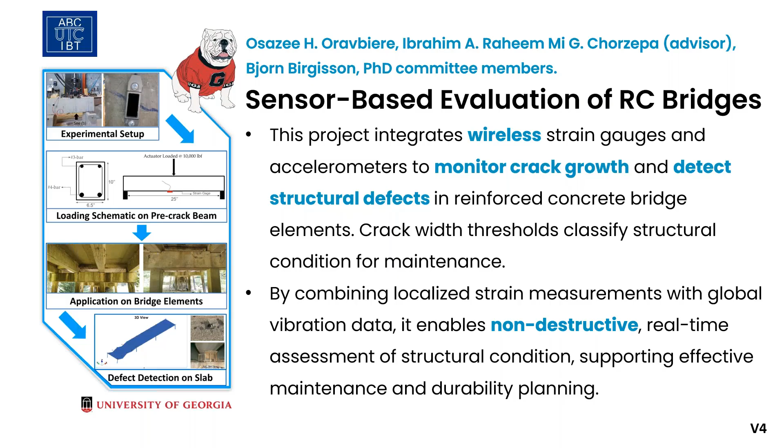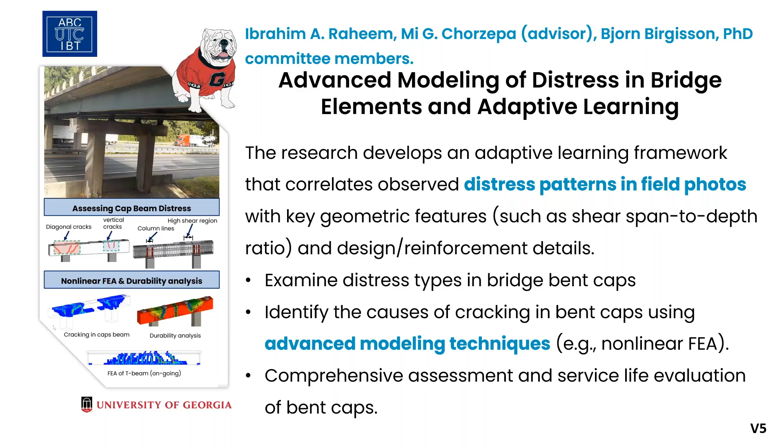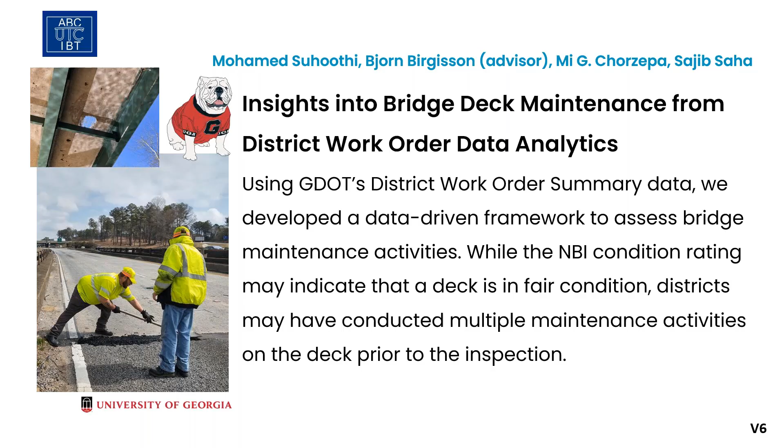Ozzy is working on wireless sensors and bridge monitoring with Georgia DOT. Ibra is doing adaptive learning and cross-referencing distress with advanced nonlinear finite element modeling. Mohammed is working on looking at bridge district data and how it interacts with NBI deck rating.

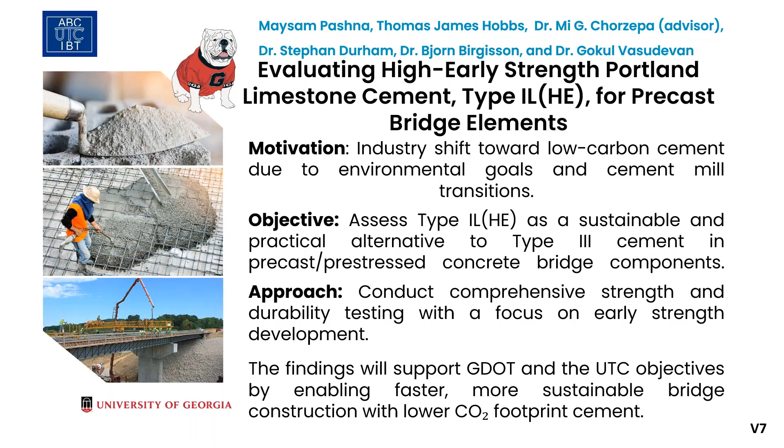Maysam is working on type IL(HE) cement to replace type 3 cement and mixing concrete mixtures at the lab. Jace and Sarah are working on developing in-person, on-demand bridge training modules for off-system bridge owners.

This is an ongoing effort, and we'll be able to deliver the first training module with a district shortly. Sachin, another PhD student, is working on delivering and enhancing bridge education for knowledge transfer.

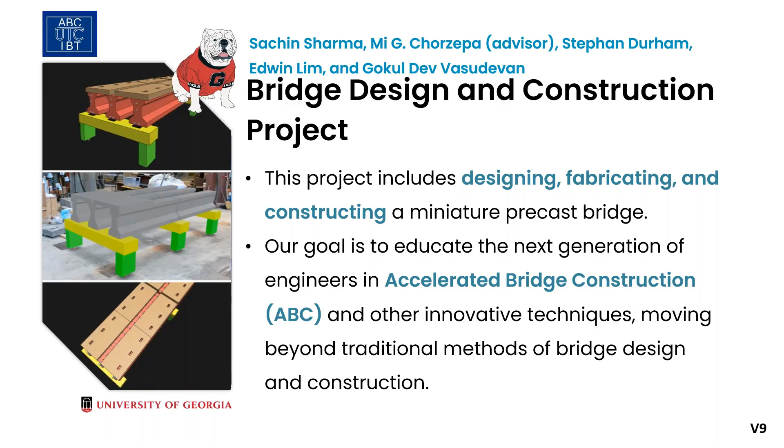This project is funded by the PCI Foundation, Georgia Carolinas PCI, in conjunction with resources provided through FIU. We are teaching our students by delivering hands-on experience in fabricating precast bridge elements.

Another element of knowledge transfer at UGA that we're working on as part of the UTC member partner is that we have just launched an online Master's in Civil Engineering, and we are requiring a bridge engineering studio as part of this class. We collaborate with Georgia DOT, Don Digman, and Ravendra with maintenance and more.

We also collaborate with design companies such as MBI and Gresham Smith, and hope to collaborate more, showing the fabrication process with standard concrete products, highlighting construction with CW Matthews, and finally teaching the concept of accelerated bridge construction with FIU, FHWA, and State DOT resources.

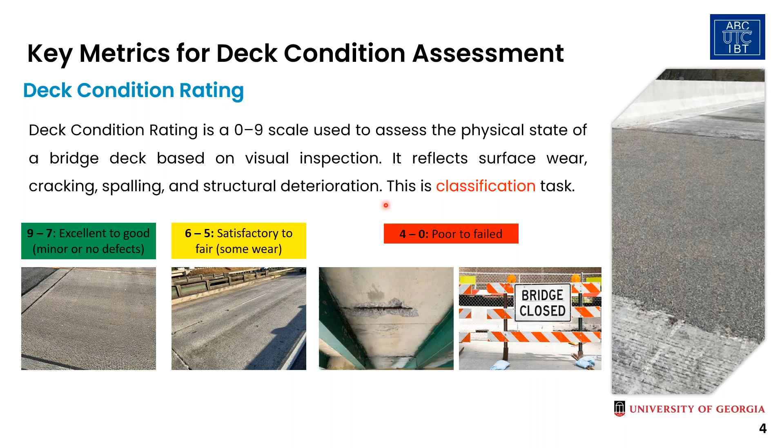In terms of developing a deep learning model, the deck condition rating is a classification task, mainly because we're choosing from a fixed range of labels, from 0 to 9. These are fixed labels, not a continuous number to predict.

The other metric, the deck health index, is a continuous value we're trying to predict, ranging from 0 to 100. The deck health index is a composite score that quantifies the overall condition of the bridge deck by considering the extent and severity of defects across the deck area.

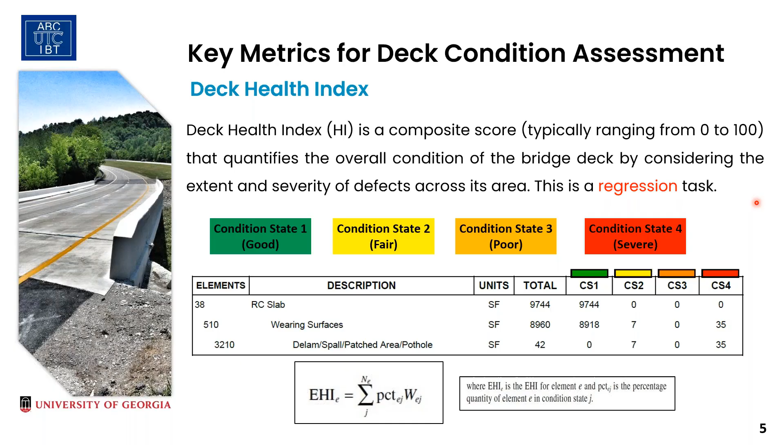This makes it a regression task for the models we're going to develop. Briefly, I'm going to go over some of the prediction models out there. As we know, there are many prediction models, but my major focus for this presentation is on the models present in the FHWA InfoBridge platform, which contains three major predictive models for bridge components.

And what I mean by components are the deck, the superstructure, and the substructure. The first of these models is the base model, which is a statistical deterministic model, while the second model was a survival model, and then finally they have the machine learning model.

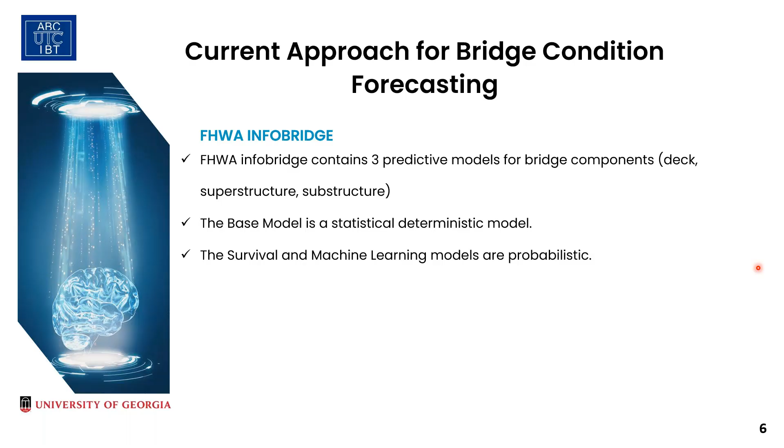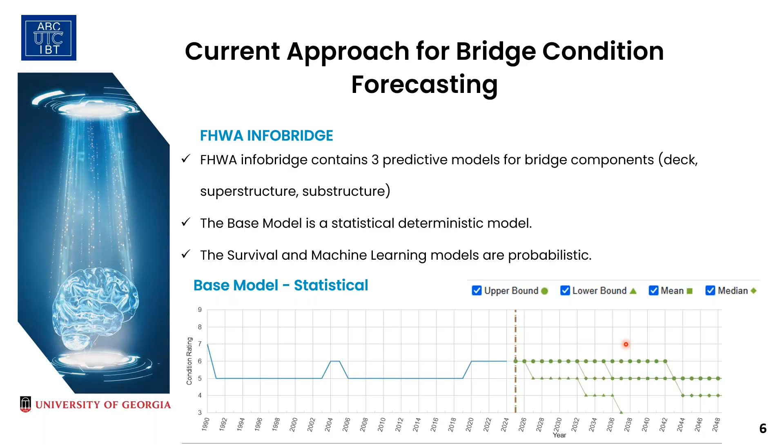Now, going over the first model, which is the base model. The base model generally uses the historical time and condition data for similar bridges to predict future conditions. It looks at bridges with similar features and learns how their conditions have changed over time. From this plot, you can see the blue line shows the actual past condition rating for this selected bridge, and these green dots right in front of it are the model's predictions based on how similar bridges have deteriorated in the past.

The second model present in the FHWA InfoBridge platform is the survival model. It works by using a combination of survival analysis and Markov chains, calculating the transition probability of changing from one condition state to another over time.

But for the two models I've gone over so far, one major limitation with both of them is they majorly focus their prediction based on the past condition state and ignore factors that can influence the change of bridge condition over time, such as traffic, the bridge age, the bridge material, and the likes. But one FHWA model that actually incorporates all of this is the machine learning model, where they made use of the convolutional neural network, the CNN. In this case, the CNN learns the patterns from the bridge features to predict how bridges deteriorate over time.

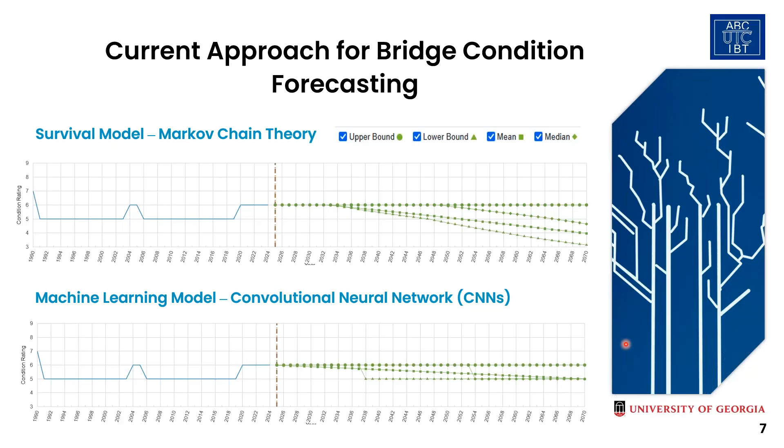At the University of Georgia, one thing we developed is a model that also considers all the features just like the FHWA CNN model. But one thing we added to it was to have a model that captures temporal progression and also has an improved accuracy.

So we developed the recurrent neural network model, in this case, the LSTM, that is the long short-term memory model, and the gated recurrent unit model, which were both designed to process the input data year by year.

And what I mean by this is, let's say we have nine years of bridge data. The model is going to learn how the bridge condition has evolved from the first year down to the ninth year, and then it's going to use the learned sequence to make predictions of what is going to happen next. So RNN, in summary, generally learns when and why deterioration happens and not just make predictions of what's going to happen next.

In the development of prediction models, there are several steps involved. The first step is to retrieve the necessary database we need to build the model. So we collected nine years of the National Bridge Inventory data and bridge element data, and this database generally contains the relevant geometric and operational features needed to process the development of the model.

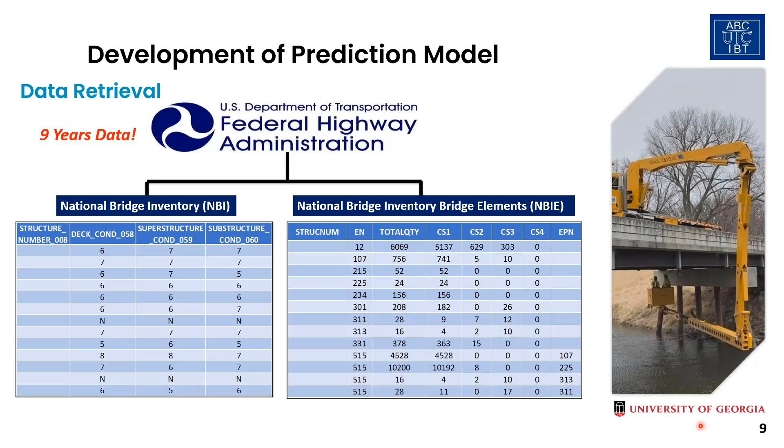And in training our models, we wanted to build a robust model that's going to generalize well. So we needed to select two states with contrasting bridge deck data. We carried out a nationwide deck assessment using the 2024 National Bridge Inventory database to determine the states with the highest percentage of decks in good and poor condition.

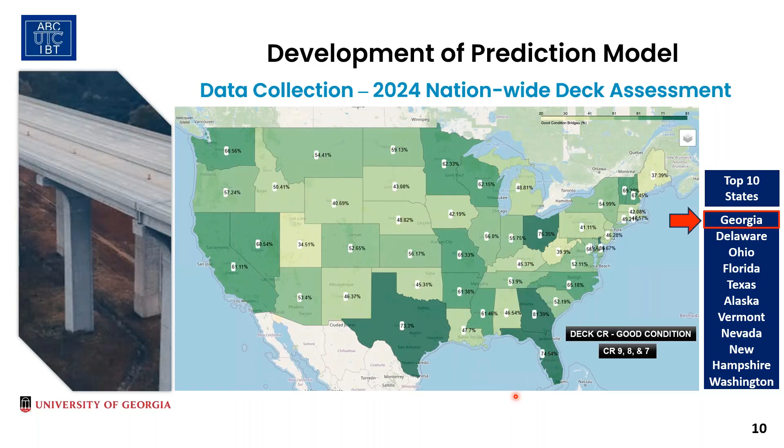So first we looked at the percentage of decks in good condition, and you can see from these figures, the states with the darker shades of green, just like Texas, Florida, Georgia, indicate the states that have a high percentage of decks in good condition. So from this, we were able to select Georgia as it ranked number one in the country.

And then on the other side of this, we looked at the percentage of decks in poor condition nationwide, and we narrowed this down to Iowa and Maine as the top two states with a high percentage of decks in poor condition. But we decided to go with Iowa as they have more bridges than Maine. In Iowa, they have more than 20,000 bridges, and in Maine, they have less than 3,000 bridges.

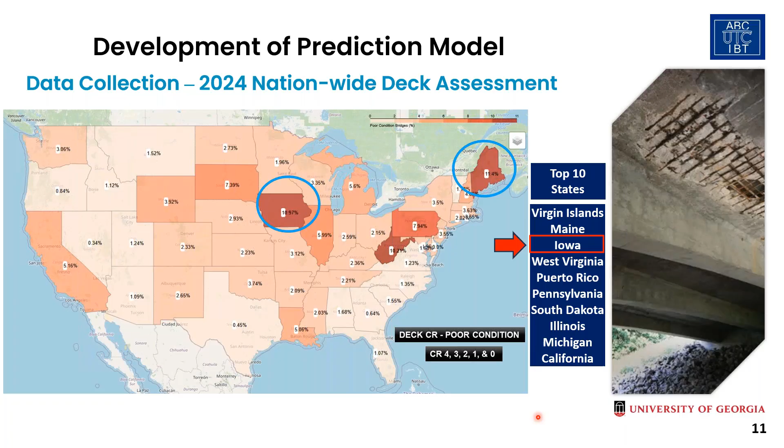One thing about training a deep learning model is the more data points you have present, the better it is for the model to learn. And since the assessment we carried out so far was done using just one year of data, the 2024 NBI data, we decided to look at the trend for the selected states. In this case, we selected Georgia for the states with a high percentage of decks in good condition, and Iowa for the other side of it.

One thing we did was look at the deck condition rating for the last 5 years to better understand the trend in each of the states. We noticed that in Georgia there's an upward trend in the percentage of decks in good condition, while in Iowa the reverse is the case.

Having this kind of contrast is very good for training our prediction model, because it's going to be very robust. But for the rest of this presentation, my major focus is going to be on a model we trained using the Georgia database. So for the Georgia data, we were able to select a set of features used to train the model in predicting each of the metrics we wanted to predict.

We came about these features from several iterations, relating with several literatures, and also from the conversations we had with some DOT personnel. But one thing to mention is for other states that plan on implementing this approach, the set of features selected for each state might differ.

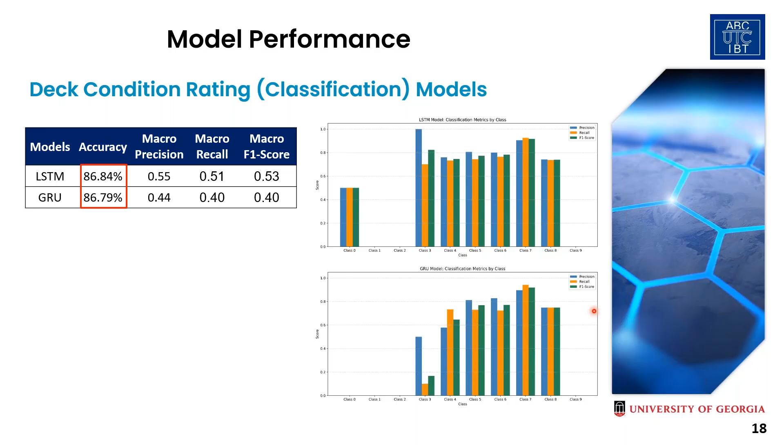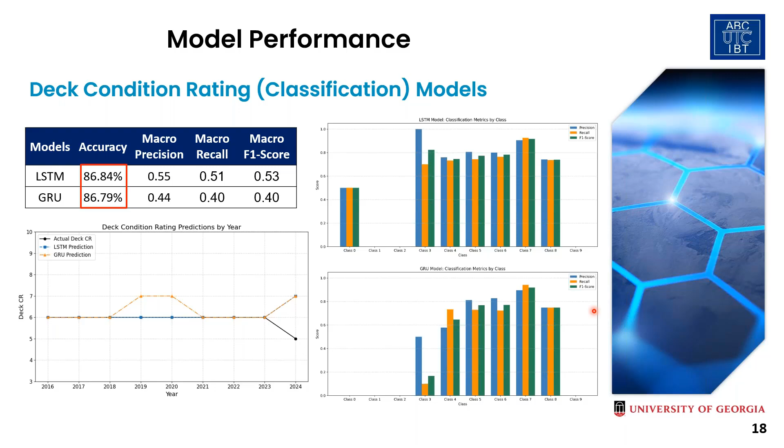Now, to evaluate the long-term use of the trained model, we selected the best performing classification model to make future bridge deck condition rating predictions from 2025 to 2032, using the model's learning from historical data from the state inventory. We can see that the model predicts a minor deterioration in 2025 and then reverts to the longer term stable trend it has observed in the state inventory.

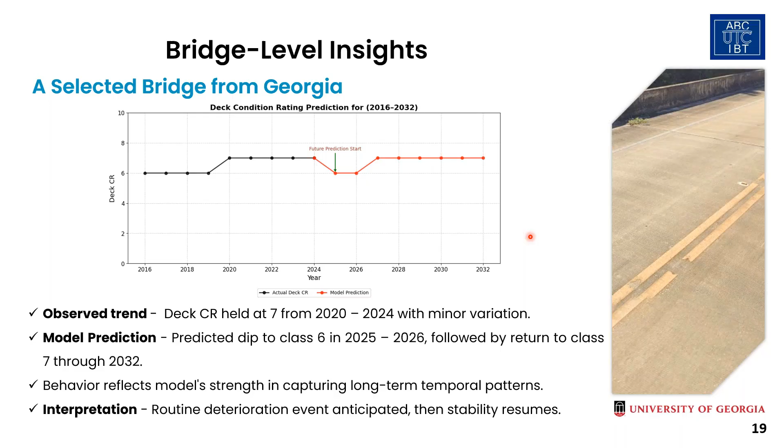But since Georgia bridges exhibit mainly an improving deck condition trend, evaluating the RNN model's ability to actually predict progressive deterioration could not be adequately tested using Georgia data alone. So to fairly evaluate the model's ability to predict declining condition scenarios, we considered the data from the Iowa database we collected earlier.

Using the same architecture but a different set of features, we trained the model on Iowa data, and selected a bridge in Iowa to make future predictions. From this plot, we can see that after a long stable period in condition 8, the actual rating drops to condition state 7 in 2024.

And then the model picks up on this change, predicts a slight recovery, and then a gradual decline into 2032 to condition state 6. This behavior reflects the Iowa training dataset, which contains a lot of bridges in fair condition.

Using another state's data to test how the model performs shows the importance of training the model for specific state regions, as it captures the localized degradation behavior in each of these regions.

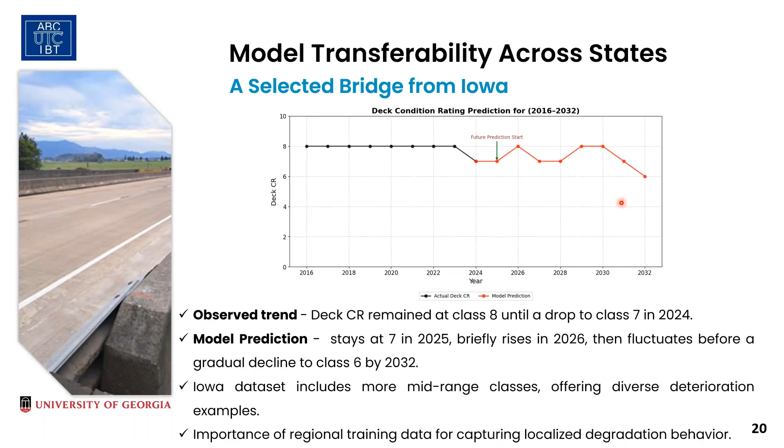In terms of other applications of this model, we extended it to predicting the overall bridge health index, which combines the deck, superstructure, and substructure condition ratings using weighted coefficients.

For this selected bridge, we can see that both models actually track the actual bridge health index value closely. This demonstrates the model's flexibility to predict composite indices like the bridge health index, not just individual bridge components.

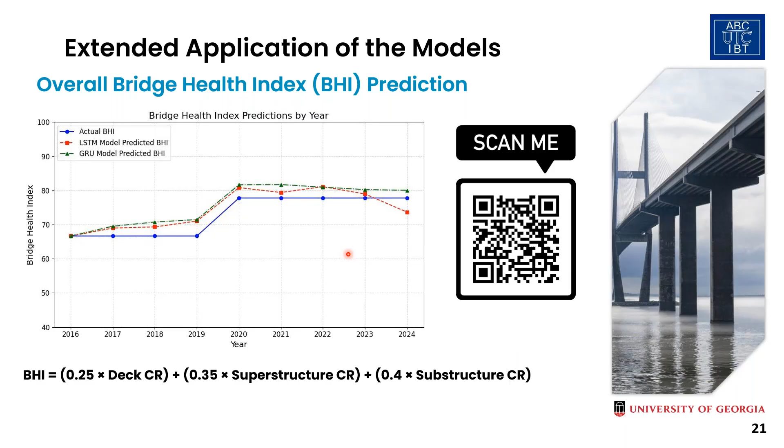You can scan this QR code to get more information about this approach, because we recently published a paper that details a lot of the process in developing a model to make an overall bridge health index prediction.

In terms of network performance, the 3D plot shown here shows the model's ability to handle multi-bridge forecasting effectively. This allows DOT to assess the condition of an entire bridge inventory simultaneously.

It also provides a clear view of the future trend of the bridges in an inventory, thereby aiding bridge owners in understanding the long-term health of bridge assets.

From a planning and budget allocation point of view, the ability to predict the future condition trend at both the bridge and network level helps in making data-driven maintenance decisions, resource allocation, and long-term capital investment strategies.

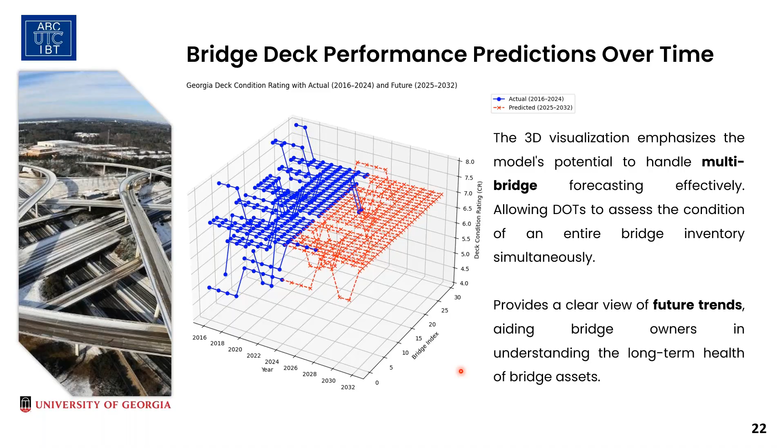So in summary, one thing I want to emphasize is that we have developed two prediction models, one with a dense layer and one with a time-distributed layer, and both are capable of making bridge condition predictions.

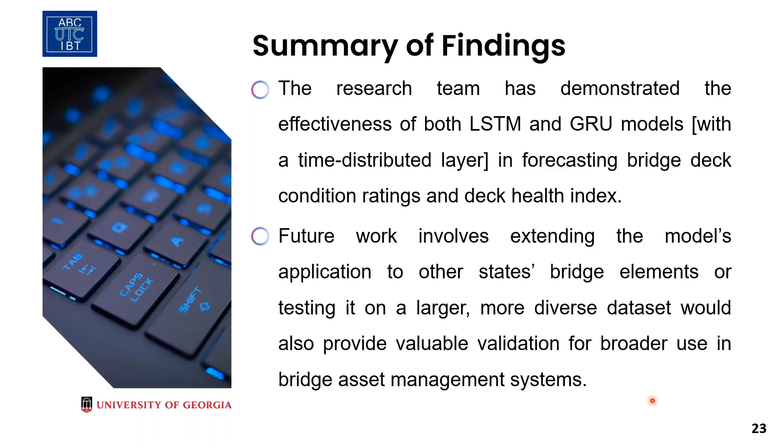In this UTC project, I specifically worked on the scenario-based decision support part to develop a next generation asset management system. As already explained, in addition to the temporal prediction of structural condition rating, we utilized a graph-based modeling approach for spatial network integrity assessment.

As you know, the highway system is inherently structured as planar networks. They can naturally be adapted to primal graphs. In doing so, we first acquired a statewide roadway network dataset for Georgia in a geospatial format from the Georgia DOT website.

As you can see in the figure at left, the Georgia network consists of 205,292 roadway sections. To obtain the spatial distribution of bridges in Georgia, a bridge geodatabase was also collected from the Federal Highway Administration website.

Deck condition rating of those bridges, obtained from the National Bridge Inventory database, typically ranges from 0 to 9. But for Georgia, the rating is highly concentrated between 5 to 8, as you can see from the figure at right.

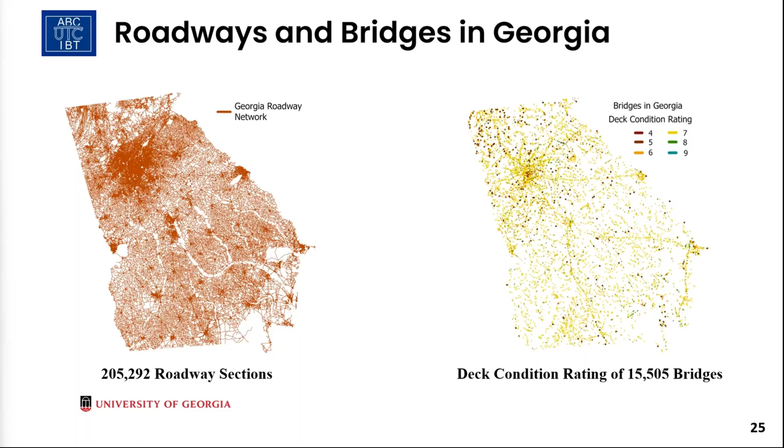Now, to generate a graph network for the highway bridge system within Georgia's National Highway Freight Network, first, GIS shapefiles of the freight network were collected from the Federal Highway Administration portal, as you can see from the figure at left.

Georgia's National Highway Freight Network spans 1,753 miles and is comprised of the most critical highway segments connecting major cities such as Atlanta, Savannah, Augusta, Macon, and Columbus.

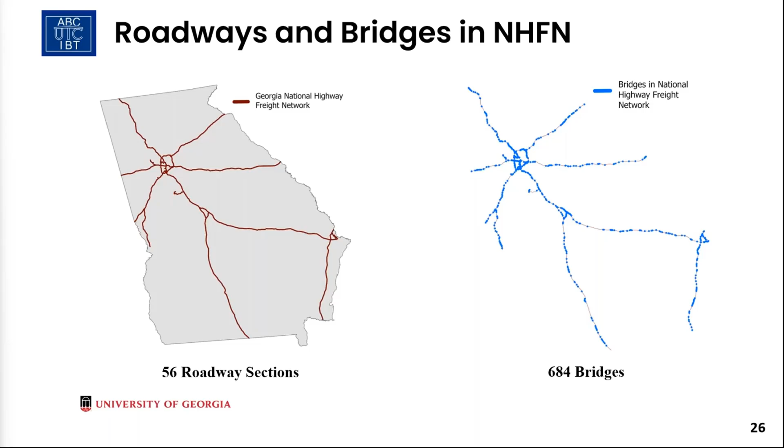And in the figure at right, you can see out of a total 15,505 bridges in Georgia, only 684 bridges are identified passing through this National Highway Freight Network.

Now, once we obtain the shapefile of the National Highway Freight Network, a Python library, NetworkX, is used to convert it into a network graph, as you can see in the figure at left.

This figure illustrates the structure of the network by displaying the distribution of node degrees. Here, the node means the intersection in the highway network, and the node's degree means the number of edges or pavement sections connected to it, or connected to the intersection.

The blue, green, orange, and red colored nodes here represent nodes with degrees of 1, 2, 3, and 4 respectively.

The figure at the right shows the number of nodes in the network for each specific degree.

Bridges within this highway freight network are integrated with the graph network of highways based on their geospatial coordinates. It is assumed in this analysis that bridges are the only component that can fail, which leads to the removal of an edge from the graph due to bridge closures.

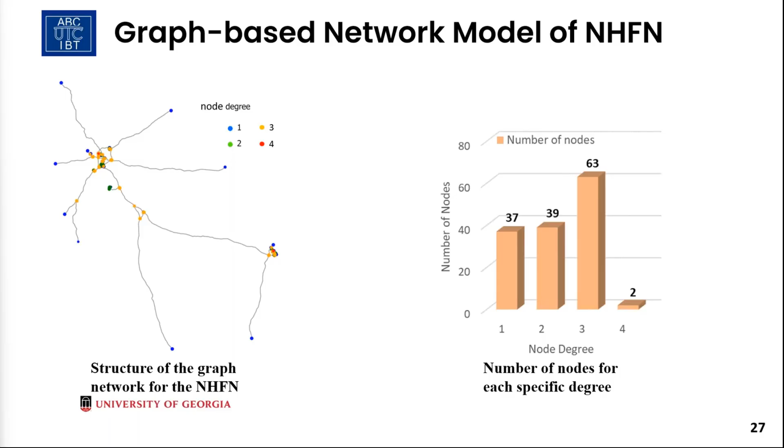Here we can see various metrics which have been introduced in the past to assess the topological integrity and robustness of roadway networks. Some of them are listed here, such as global efficiency, average distance, percolation limit, average node connectivity, maximum betweenness centrality, and network robustness index.

Out of all these measures, we have seen that node connectivity, betweenness centrality, and robustness index are the most popular metrics. For example, the robustness index metric is characterized based on the average size of the giant connected component of a network after removing each node one by one.

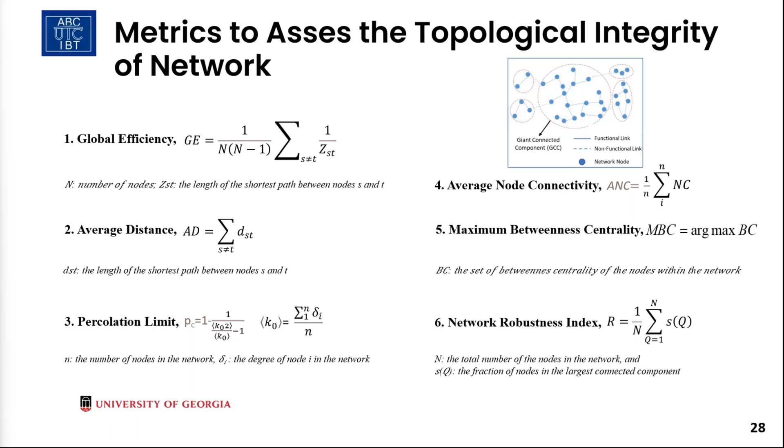A description of what the giant connected component is: for our analysis, we used a metric named connectivity to assess the topological integrity. Connectivity is defined as the ratio of the size of the giant connected component after vulnerable nodes are removed and the original size of the network.

As you can see from this equation here, to illustrate it better, you can see the figure at the left. This figure demonstrates that if the original intact network is comprised of 32 nodes and 33 functional edges.

And 5 edges become dysfunctional due to a disruption, the network will break into 5 separate subnetworks. In that scenario, the largest subcomponent, which is the middle one in this case, will contain 18 nodes. Hence, the relative size of the giant connected component, or in other words, the connectivity under this disruption, can be calculated as 18 over 32.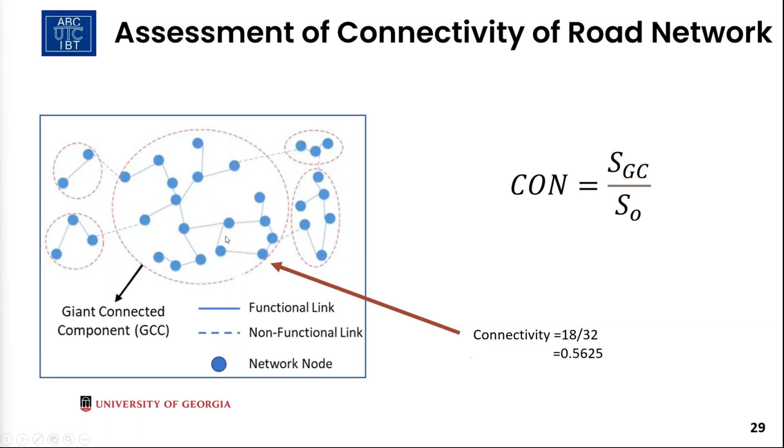Deck condition rating is selected as the performance indicator here due to the high susceptibility of bridge decks to deterioration. A maintenance threshold value of deck condition rating 6 is assumed in this analysis to demonstrate the application of the graph-based network analysis. But we want to emphasize that this assumption of a threshold value of 6 is just for illustration purposes.

Because of high deck condition ratings across Georgia, lower threshold values such as deck condition rating 4 or 5 could not be meaningfully applied here.

In 2024, 68 bridges in the National Highway Freight Network are identified with a deck condition rating of 6 or below, as you can see in the figure at the left. Similarly, projections from the recurrent neural network model estimate this number will decrease to 23 by 2032, which also indicates improvement resulting from ongoing maintenance and repair activities across Georgia bridges.

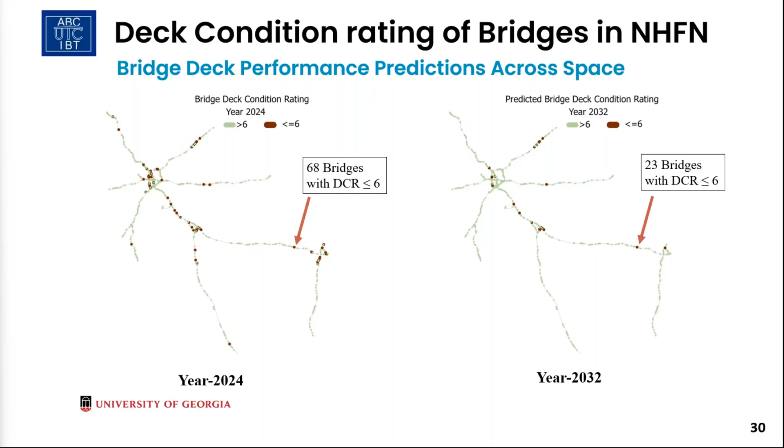These low-rated bridges are used next in the graph network analysis to show the potential impact of bridge closures on the freight network. So these illustrate the connectivity profile of the National Highway Freight Network for 2024.

This figure shows the change in the connectivity of the network due to randomly eliminating a certain percentage of bridges involving low deck condition rating. The process simulates the potential effect on the freight network due to bridge closures for repair or maintenance.

In order to reduce the possible impact of random sampling, 50 simulations are conducted in this analysis at each step, with bridge removals occurring in 2% increments. As you can see in the figure at the right, a 2% increment of bridge closure is conducted at each step, and 50 random simulations are conducted to calculate the standard deviation and the mean value.

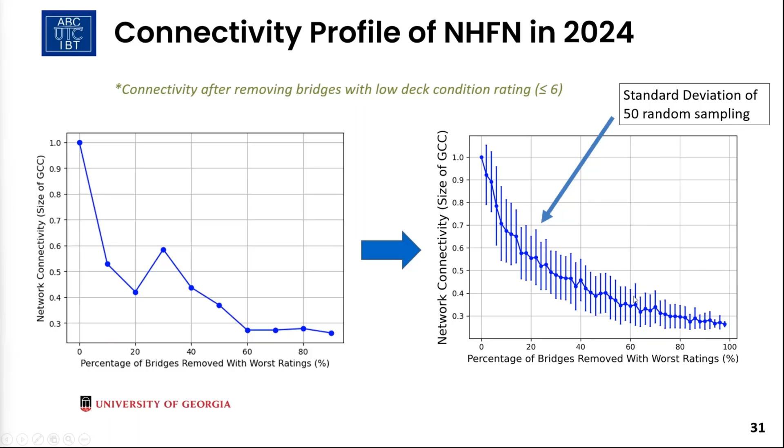To illustrate it better, for example, when 40% of the low-rated bridges are closed, the connectivity of the 2032 freight network is reduced to 65% of its original size, whereas in 2024, the connectivity drops to approximately 46%.

Based on the results of the integrated RNN model and graph network analysis, highly critical bridges are selected based on two independent factors: first, low deck condition rating, and second, high network connectivity.

The table here lists the network connectivity measures after the removal of each critical bridge separately. It also includes the current year 2024 and the future year 2032 deck condition ratings.

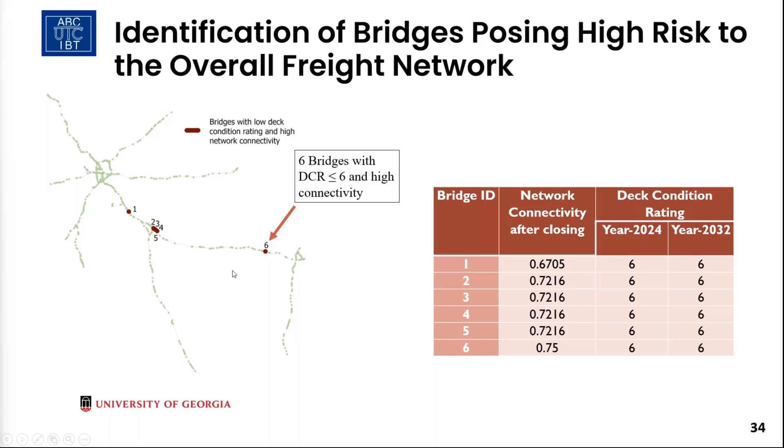The figure at the left illustrates the spatial location of those bridges in the network, highlighted in brown.

Now, to assess the improvement after prioritizing repairs of those selected 6 bridges, we conducted a simulation study that reflects the state of the network in 2032.

The analysis focused on the 17 remaining bridges within the National Highway Freight Network that are predicted to have a low deck condition rating. The results indicate that the 2032 network, after repairing the 6 most critical bridges as shown in the previous slide, exhibits significantly improved connectivity, as you can see in the green plot, compared to before prioritizing repair actions, shown by the orange plot.

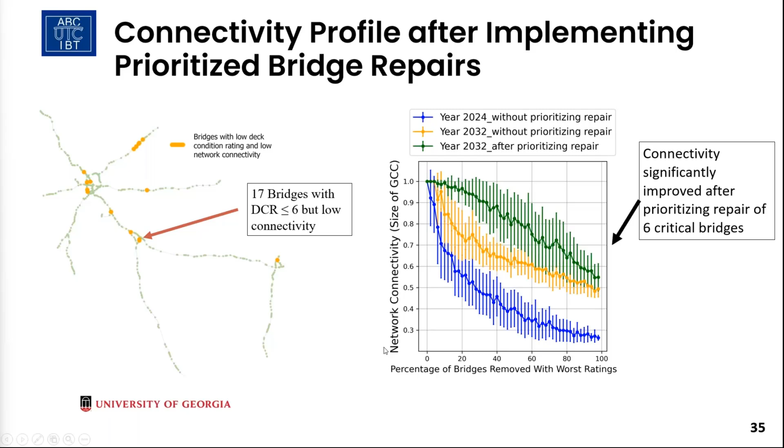It also indicates enhanced resilience to bridge closure after taking these repair actions for those selected 6 bridges. It highlights the value of integrating predictive condition assessment with topological network-based criticality analysis for prioritizing maintenance action and allocating budget resources. Now, finally, I would like to discuss the practical application of our work for future investigation.

This integrated approach can potentially be applied to identify high-risk bridges within road networks under various disruptions, such as flooding or the introduction of automated vehicles.

For the state of Georgia, the Interstate Intelligent Transportation System and the Connected Vehicle Implementation Project proposes to implement a future connected autonomous vehicle system along I-75, as well as I-475 and 575, as you can see in the figure at the left. Now, 178 bridges in that project corridor will be exposed to heavy truck loads, which also increases the risk of potential disruption.

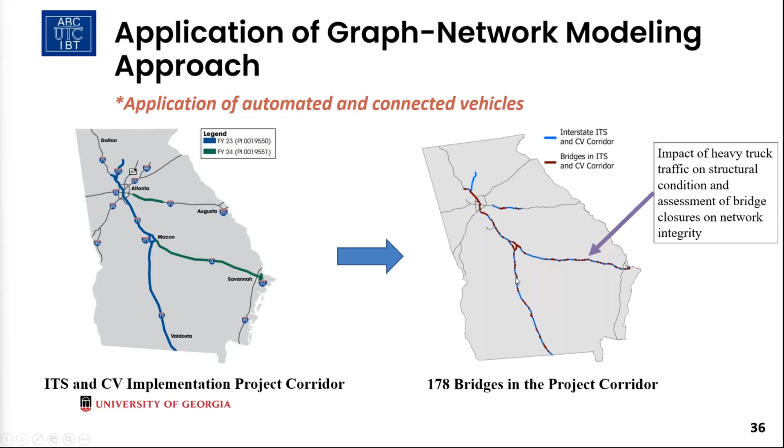Finally, in conclusion, this integrated graph network RNN modeling approach helps us effectively identify bridges that pose a high risk to freight network connectivity and also supports the prioritization of repair actions. This work can be further extended to other states' bridge networks, and can be tested on larger, more diverse data sets for broader use in bridge asset management systems.

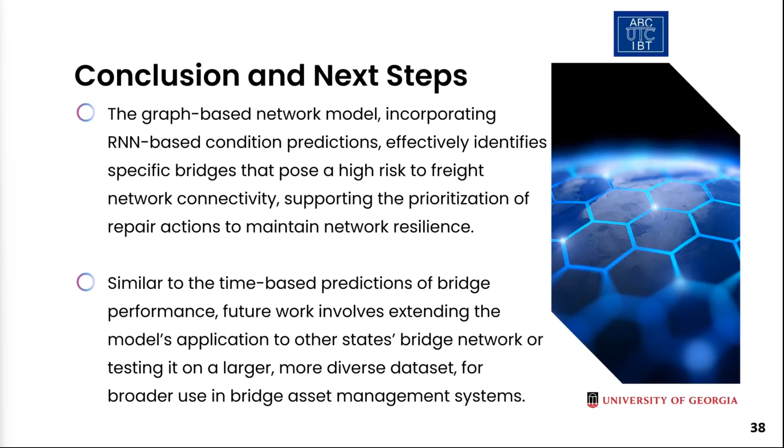Thank you, Dr. Saha. This is a brief recap of the next generation bridge asset management system. FIU is the lead institution collaborating with UGA and other partnering universities. There are core elements that we have identified.

One of the important elements, particularly service life prediction, we're still using past data, and how do we use real-time data and sensors. Another thing is using evolving technology: digital twin, and remote sensing, and even connected infrastructure.

And in terms of replacement, there are a lot of things like project bundling and demand forecasting scenario-based, that Dr. Saha kind of looked into, and smart contracting, and even some of these being able to look at inspection and replacement in the metaverse space.

And Dr. Atorod Azizinamini has an internal white paper, and I've been meeting with him a couple of times to discuss what would be the elements of next generation asset management. And he created an ad hoc committee, graciously chaired by Don Digman with the Georgia Department of Transportation.